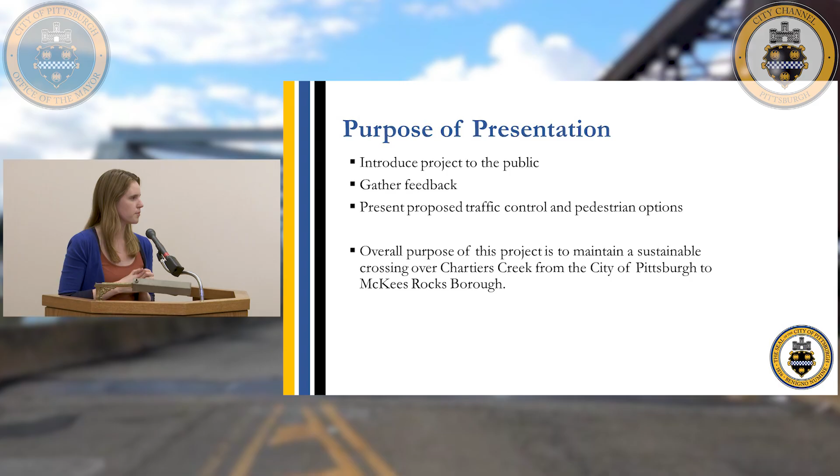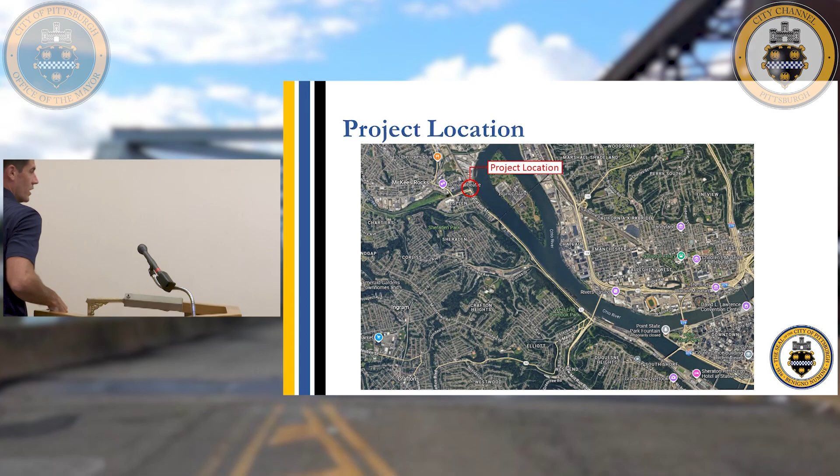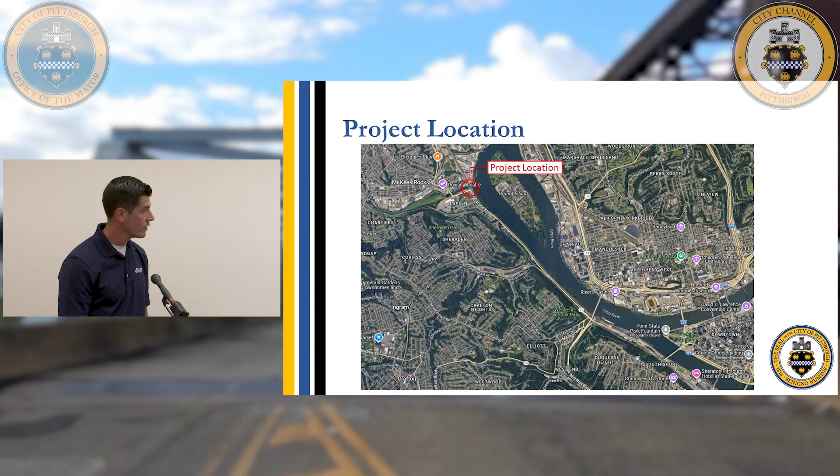Thanks, Erin. My name is Ryan Murphy. I'm with JMT. I am the project manager for the West Carson Street project. As most of you know, it's located right down the street between the northern limits of the city of Pittsburgh and McKees Rocks.

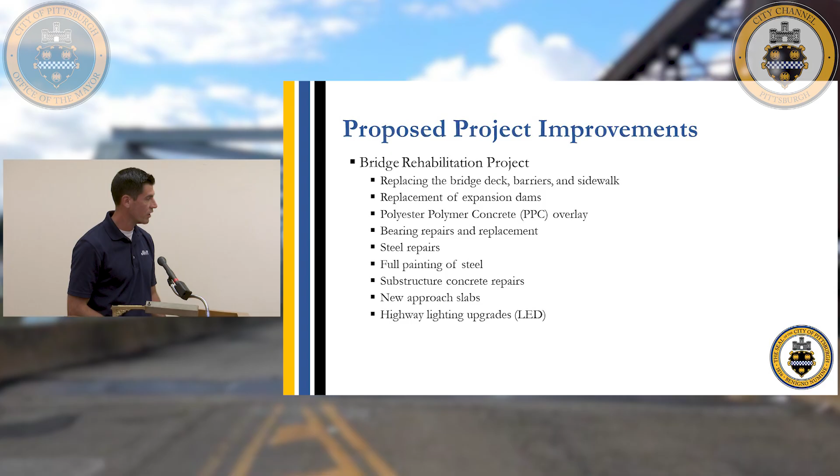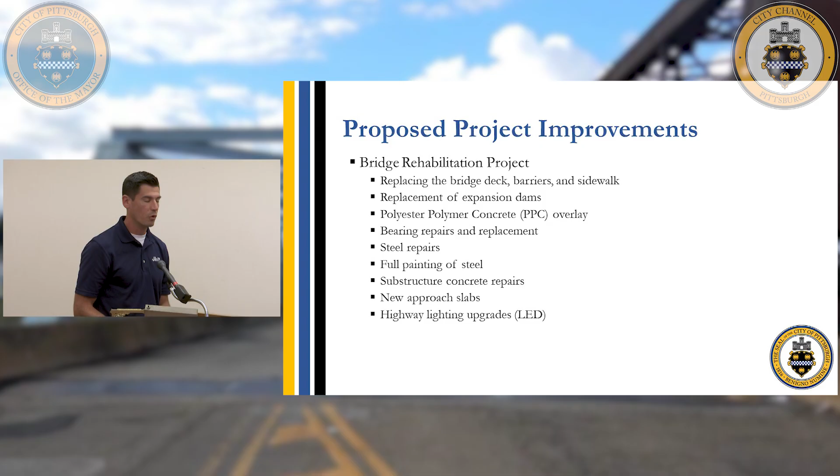Some of the proposed project improvements for the structure: this is a rehabilitation, so we're keeping the structure as it is, just rehabilitating it. We're going to be putting on a new concrete deck, barriers, and sidewalk, replacing all the expansion dams, taking those plates off, putting new dams in, and securing it from water infiltration from above. We're putting a PPC, a fancy term for concrete overlay, on top, along with some steel repairs, full paint of the structure, bearing replacements and repairs, and new approach slabs. So pretty much from the McKees Rocks side all the way to the PennDOT limit on Stanhope Street will be all new concrete when everything is said and done. There's also a couple of city lights that will be receiving new LEDs.

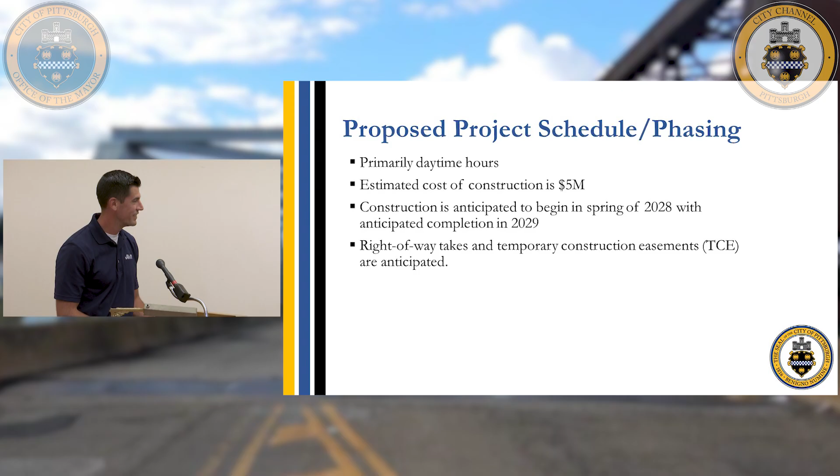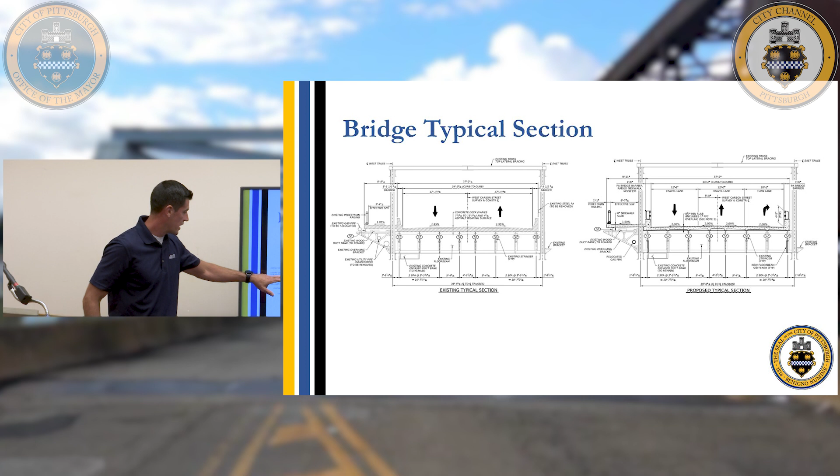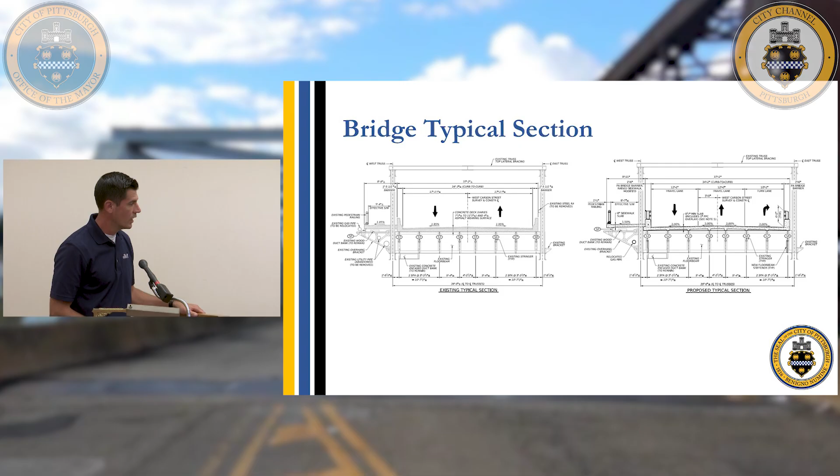What's really hard to see here is the sidewalk. You'll notice on the existing structure there's a gas line. We're proposing to tuck that under the sidewalk, get it off of the sidewalk, and actually move the sidewalk out closer to the edge, making it a little bit wider for ADA and pedestrian purposes when crossing. Everything underneath is pretty much the same; we are putting some new beams in here and there because of some deterioration, but overall the typical section looks largely the same. You can also see from existing to proposed a new barrier type - there will be a higher barrier with a steel rail for aesthetic purposes.

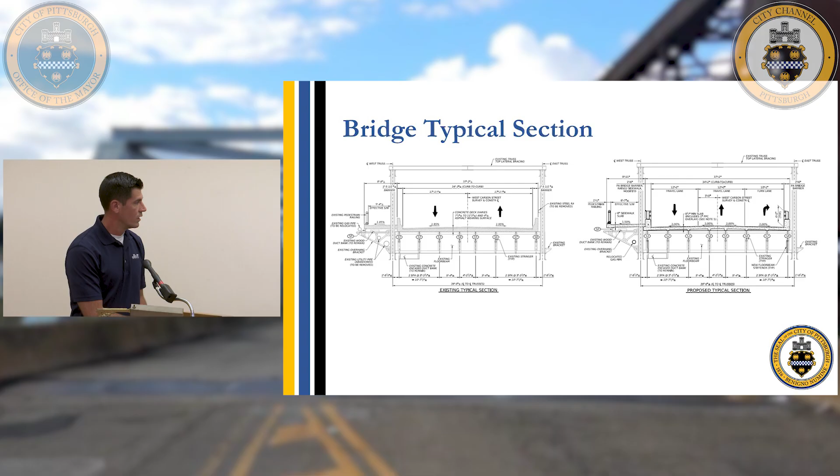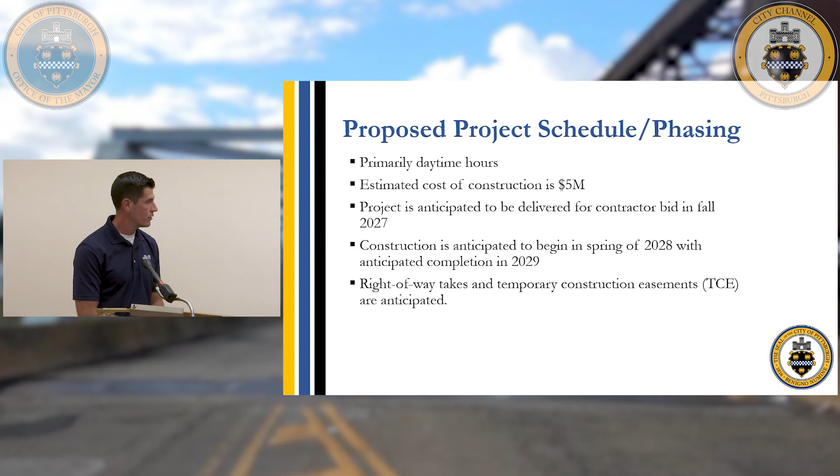And with that, we can talk about some traffic control. So Amanda from TPD is who will be leading the traffic control for us.

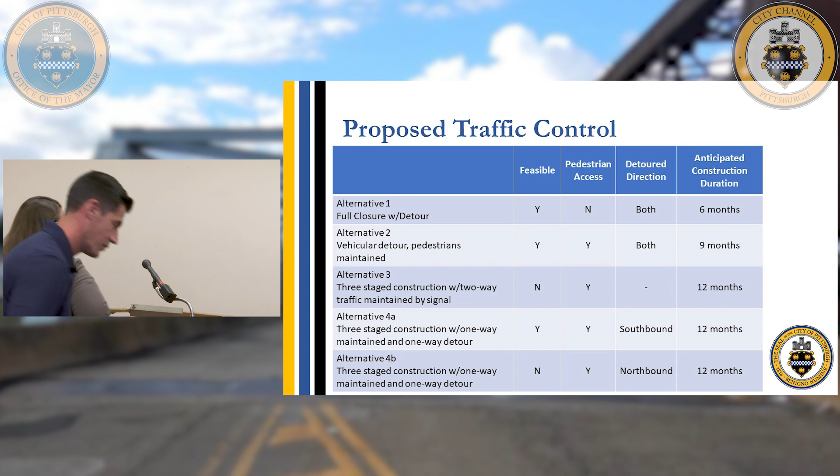Oh, it's hard to see over here. All right, for the traffic control, we have prepared 4 different alternatives to look at, and they all have varying costs associated with them and varying time durations to do the construction.

So alternative 1 is a full closure with detour. It is the shortest because there's only one phase of construction there. But the detour and the full closure is for both pedestrians and vehicles.

And then alternative 2 is the vehicular detour and pedestrian traffic on the bridge is maintained. So there will be staged construction for that one that allows the sidewalk to be built while pedestrians are on the bridge and then move back over.

Alternative 3 has 3 stages. Alternative 3 and 4 are very similar, both 3 stages. Alternative 3 was one we looked at to review if a temporary traffic signal could allow two-way traffic on the bridge. What we found was that the truck turning movements into going southbound did not work with that alternative, so that one had to be eliminated.

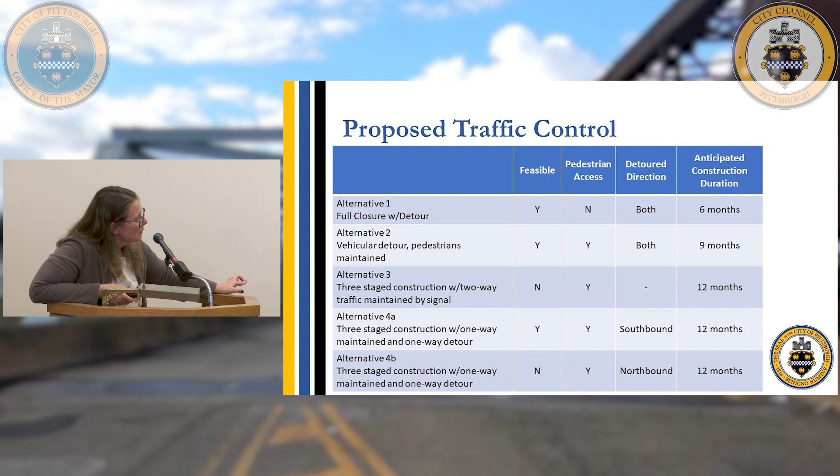Our alternative 4 was also the 3-stage construction. This one maintained... detour direction was southbound, maintained northbound traffic, which was the direction of traffic that could make those turns off of the bridge and onto River Road. And so that was found to be a feasible alternative. It is 3 phases in order to do the work that's required on the bridge.

And then alternative 4B, similar to 3, was eliminated because those turns couldn't be made in that direction. So we were left with 3 alternatives that are still on the table and have varying durations.

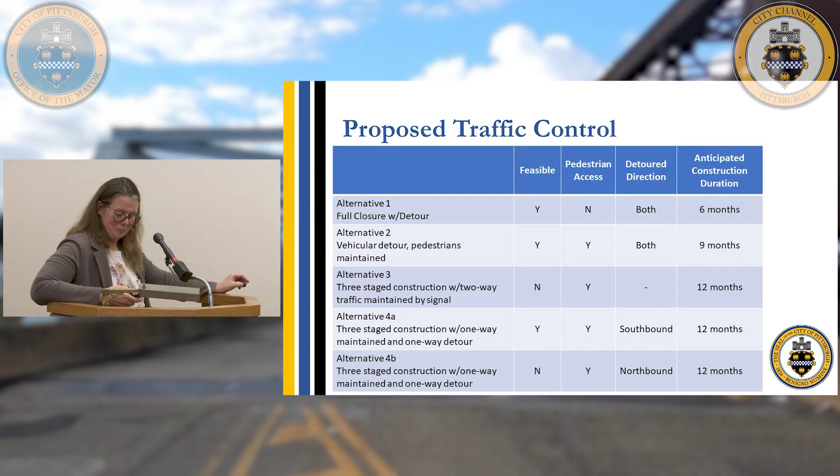And when we look at the pedestrian detour, we also understand that there is some road work going on in the back here on Linden that we currently propose to have the detour going up West Carson Street and turning down onto Linden there at the unsignalized intersection, and coming down across the bridge onto Stanhope Street, and then back up and around to the bridge. So we understand that there is some construction there.

I don't know what the time frame on that one is. There is also the sidewalk on Bell that's open to come down, and that one would be an acceptable way to get through there if the road is still closed.

We'll also look at the private property shopping center and have some discussions with them in the future to see if there is any possibility of signing that as the pedestrian detour to come through there. But that is not something we have looked into as of yet, so that's still something to be investigated.

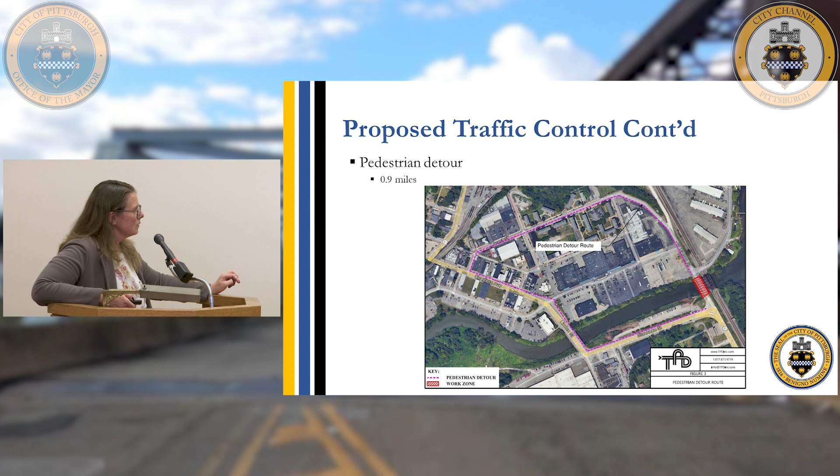And I believe that's all of my slides, but the input and questions that we'll have, we'll have at the end. We would love to hear input on the pedestrian detour and phasing, and how the community feels about the durations being longer.

As I mentioned, a full closure is the shortest, lasting about one construction season, whereas 2 phases where we maintain pedestrian access will go into the second construction season. The third option with 3 phases of construction would last probably a full 2 construction seasons, so it's a full closure or impact that entire time. So up next is Gabrielle.

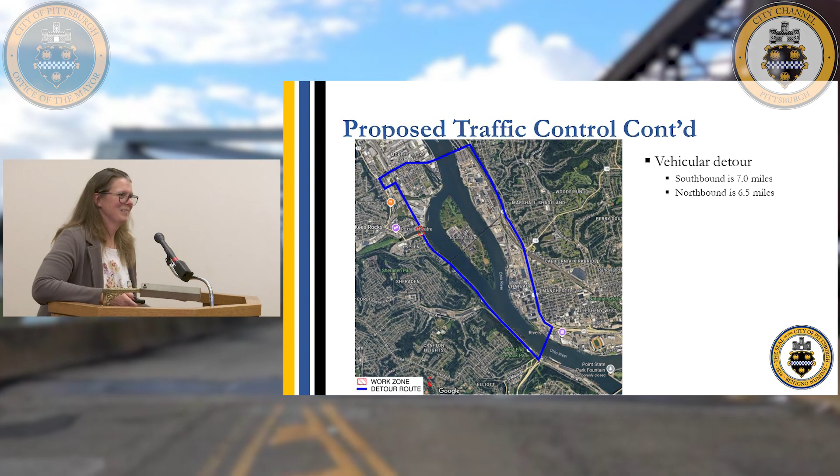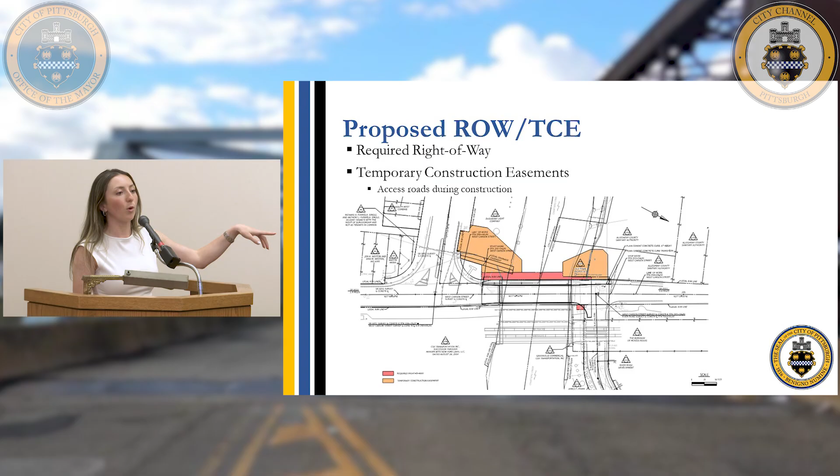The area in orangish yellow on the screen is the temporary construction easement. This area will be used to access with vehicles and construction equipment needed during the rehabilitation process. We're going to have access roads on either side of Chartiers Creek to allow for this construction to go on. The war memorial will not be impacted by this work, so it'll be protected during construction.

To fulfill the requirements of PennDOT Connect as well as the National Environmental Policy Act, we have to hold this public involvement meeting along with the PowerPoint presentation. Thank you for participating and being part of this public outreach and for providing feedback. With that, we'll open the floor up for any questions you may have.

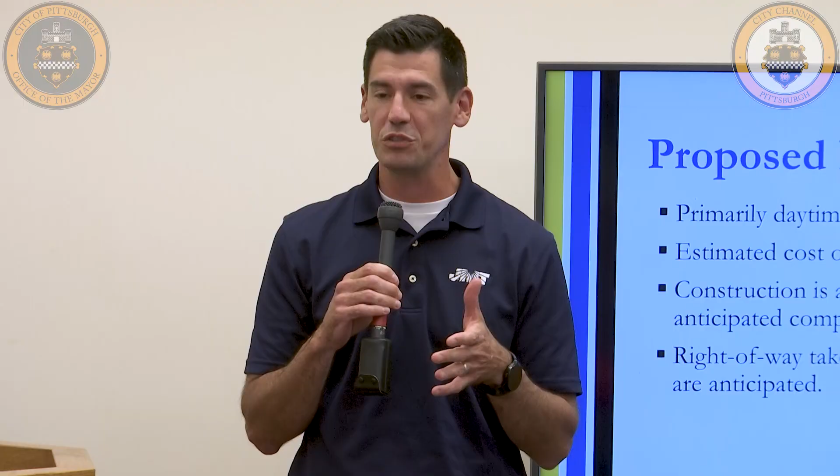Sorry about that, I believe I misspoke a little bit earlier when I said 2027. We'll be designing in 26 and 27 to deliver the bid package to the contractor, hopefully the end of 27, for 2028 construction.

I'll just add a little note. This will be bid out through PennDOT's system ECMS for a contractor to bid on in the fall of 2027, which is the current plan, and thus why there are those two dates floating around. The design will be done and out to bid, and construction is expected to start in 2028.

Could that information be added to this slide before it's sent out for everyone's access? Yeah, we can do that. Thank you. Yeah.

Any other questions or comments in the room? I also want to acknowledge Councilperson Kail-Smith joined us. Thank you. Yeah.

I just want to add that this is not the only project. We're also doing some beautification projects, and the city of Pittsburgh, you're going to have a separate meeting for that, right? So I'll let Jan talk about that later. But they received a grant for trees and beautifications, including the War Memorial. Our Department of Public Works is going to be following up with another meeting to talk about some of those beautification efforts.

Did I see your hand raised? No, I was just thinking in terms of detours and everything with all the different projects. Obviously, the McKees Rocks Bridge just reopened about a month or two ago to full access. There's rumors that the McKees Rocks Bridge will go back into some type of rehab within the next year or two. Does anyone know if that's true, or have you confirmed that that won't happen when this project's going on?